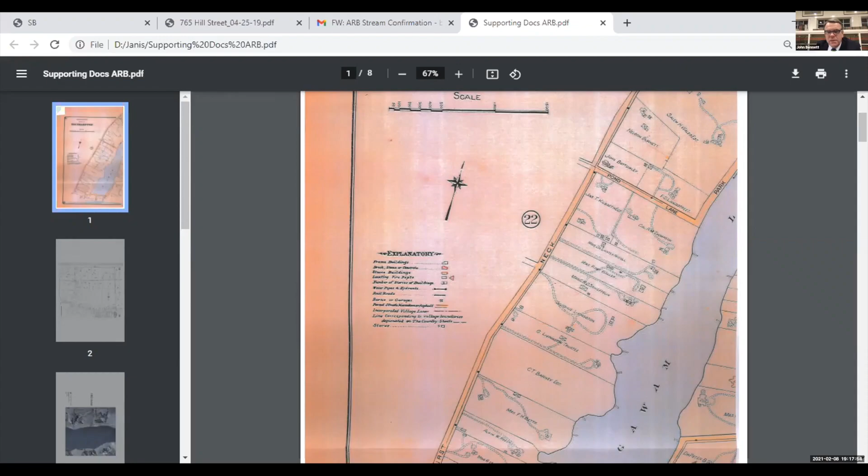Look at the west side of Agawam, look at how big those parcels were. But in any event, there's nothing where the Janis house is. And then we're going to take you to the 1926 Sanborn map, and you'll see that's about 10 years later, and you'll see nothing there also. We're lucky enough to have a copy of this in our office, just a black and white copy. So there you go, see it? Then Pond Lane - so nothing where the Janis house was. Right, then we'll take you to some aerials.

And these aerials, are these from Suffolk County or the town of Southampton? The town of Southampton aerial. You can see there's the parcel, its tax map number outlined in yellowish orange. And you'll recognize the house and even that little circular driveway. It's rather remarkable how accurate those Sanborn and Belcher Hyde things were.

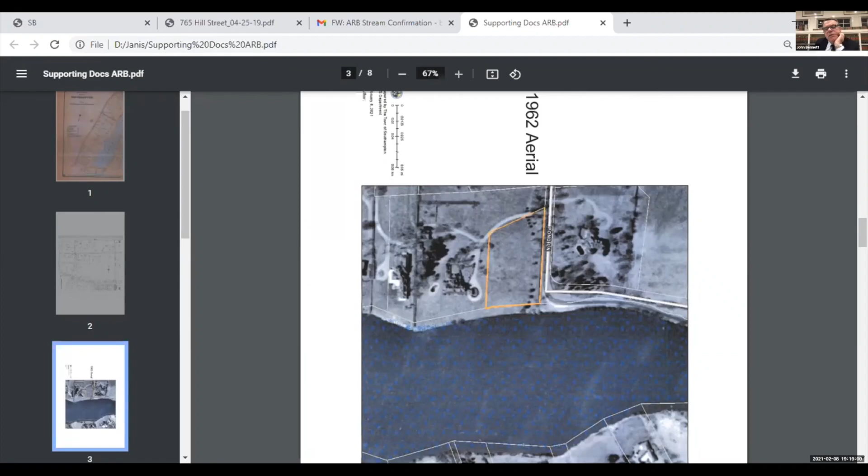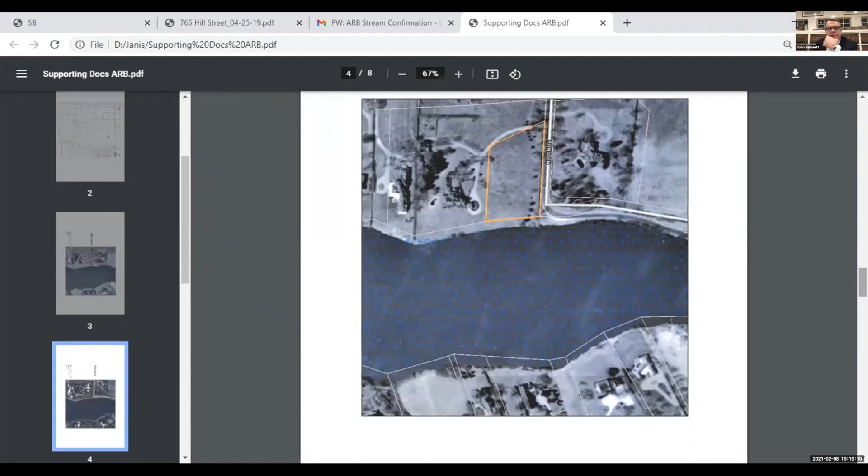There's the aerial there. You'll recognize the house that was to the south of the Janis property. So that's the 1962 aerial. And then in '76, you'll see the house appearing, but we know it was there before that. We'll show you the—

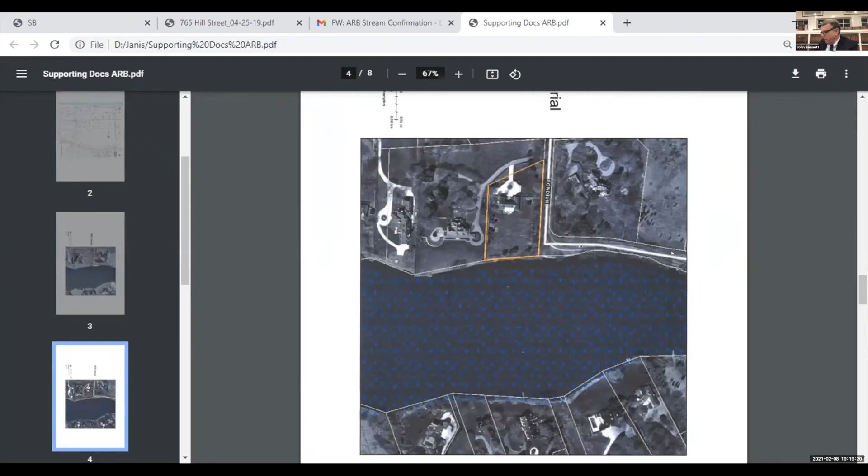Let's see, the town of Southampton has it built in 1970, but I think that's off by a couple of years, because the next thing you'll see is the village of Southampton. I don't know if you guys are familiar with these.

I guess you use them sometimes. You see them, these are the cards, we call them the cards. That's old school in the village still, the property has a card. And so 1967 is a building permit, and that's the house you see from the '76 aerial.

And if you look at the house, I always feel strange saying this because I'm sure Mrs. Janis had some wonderful times there, but it's a totally unremarkable house. It doesn't meet any criteria whatsoever. You don't know who the architect is, but he certainly wasn't having a very florid day, whoever it was. The most remarkable thing about it is the lovely spot and location. But I'm hoping you'll agree this is not really of any moment at all, and should just quickly be given a certificate of appropriateness.

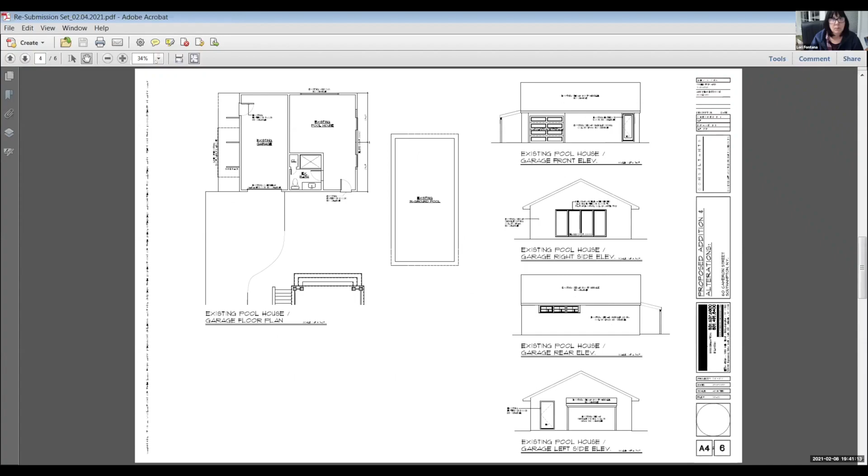I'll start, shall I? May I start, Jeff? I think we may have lost him, so go ahead, Sarah. He froze. Okay, he went on the table.

I maintain that this elevation interferes somewhat with the nice 4-square facade. I also think that, for want of a better expression, homogenizing all the window openings, you lose the idiosyncratic nature of an historic building. It becomes repetitive. And one of my biggest objections is that the proposed rear elevation is still, although better, still provides far too much light pollution in this densely packed area.

I walk down Walnut Street all the time, walking my dog, or up Pine, so I'm well aware of what a visual impact this will make. You can see the rear elevation of the Cameron Street house down behind 3 or 4 of the buildings on Walnut Street, and I think at night this will be particularly, literally, glaring for the people who live on Walnut Street. Because it is so densely packed there, it may provide the same qualities that provide light for your client's bedroom but will also shed light on the adjoining neighbors. And above all, the second story, it'll be pretty glaring. So that's all I have to say.

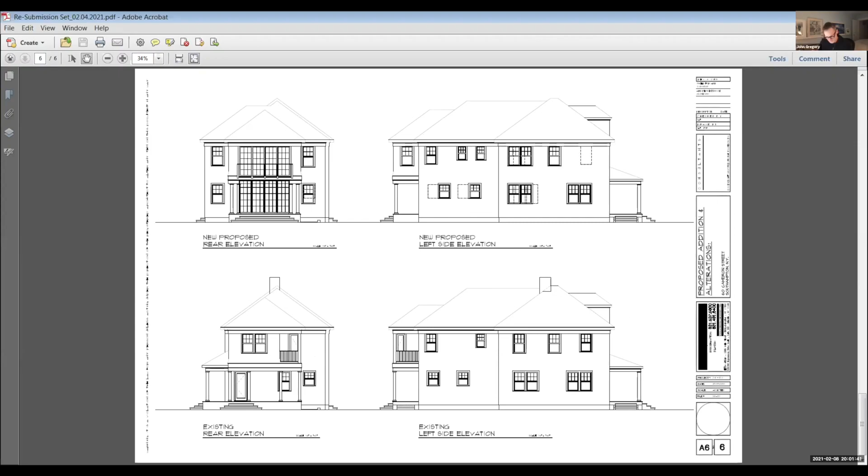I'm looking at the site plan for a second. So currently there's a patio that extends from the house almost all the way to the property line. Is that the case? It appears to be, on the west side. Would the architect like to talk about that? It's actually a stone on-grade patio, not above grade, but it's masonry coverage. It's existing.

It's always been there. And am I right in thinking that there's recently been basically a parking surface added to the front of the site? Yes, yes, we did ask permission.

Sorry if I interrupt, I will also explain about the tree. So the tree, I mean, it was actually really not something we wanted to do because we love the idea of the shade. But the tree had these branches that kept falling, and I had to call someone, and they explained to me that it's called a dirty tree, and it's a normal thing, and the branches kept falling, and twice my kids got hurt, and it became kind of my issue, the tree. And actually I asked the landscaper to plant something that will grow higher so that we also want privacy. It's not like it was an exciting choice for me. It was kind of something I couldn't avoid in this sense.

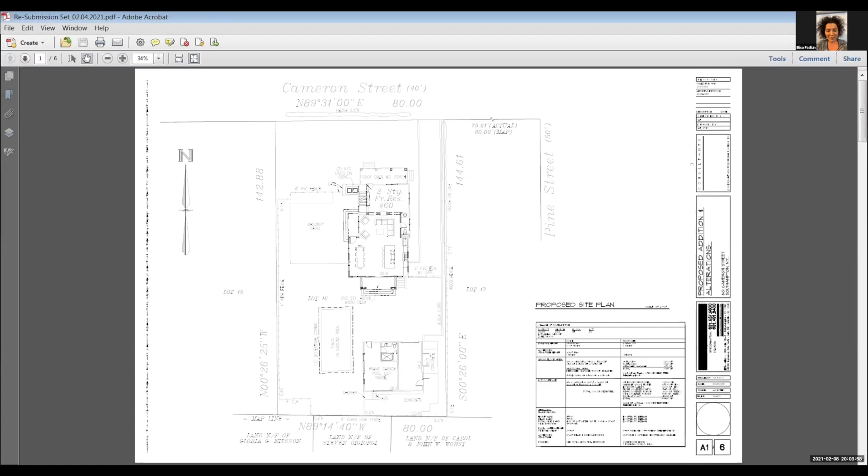And I also wanted to thank you for appreciating that we changed completely the original excessive renovation that I didn't know we couldn't do. Yeah, the front facade, that was. And the side facade, and the back, and the pool.

I'm just wondering if additional plantings could be made to help. It will absolutely be, I want more green. We really had an issue with the kids getting hurt from these branches. But yes, absolutely, those that we already planted are supposed to grow very tall. And that's what I asked the landscaper. I mean, I can plant, I'll be happy to, I'll make a jungle.

Okay, one other thing that I think will be an issue is the PVC fence. Can it be wood, painted wood? I'm sorry, which one? Oh, the fence, it's on the site plan. It says it's a 6-foot PVC fence. It exists currently, Peter. Oh, it does? Yes. Okay.

I think at this point you've heard our comments. Yeah, I have nothing more to say. Thanks, and thanks for listening.

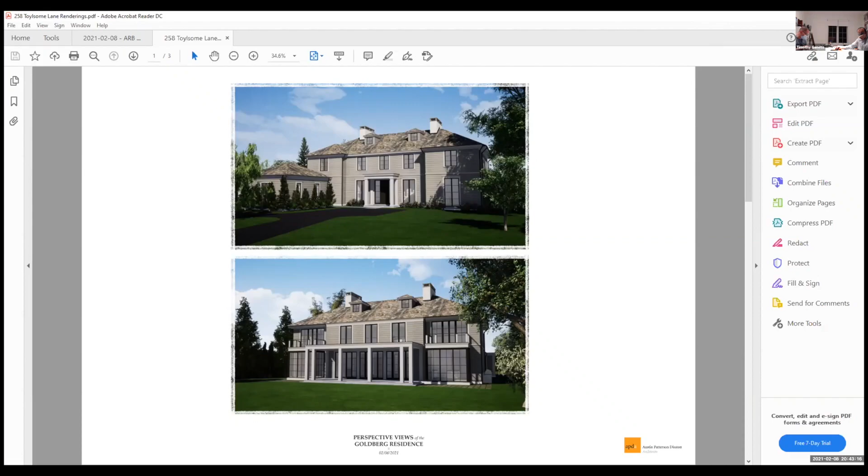We're going to switch to a legend that shows the surrounding properties and the streetscape, and Tim's going to walk you through that for a second.

In an effort for us to take the renderings and drawings and put them in context with the surrounding properties, it's important to think about Toilsome Lane, but also the entire context of the neighborhood and the adjacent streets.

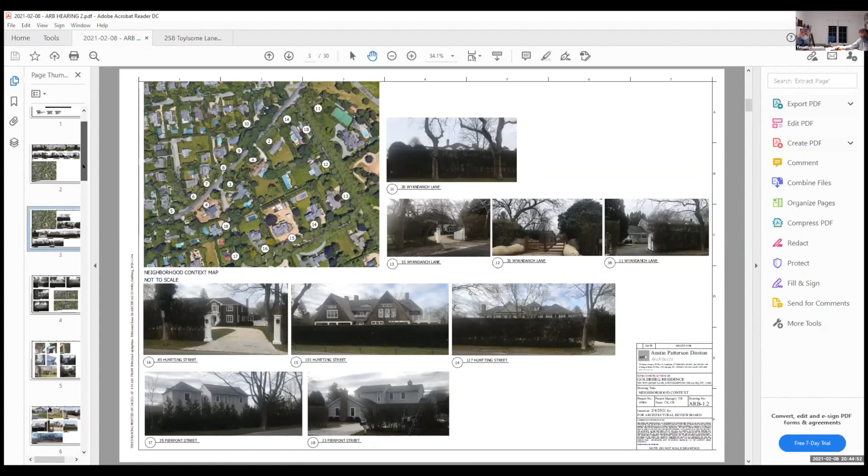That being said, I'm going to go back now to some of the other refinements to the overall presentation of the architecture. So we're going to switch now to perhaps ARB-5, which everybody has in their documents, but we'll put it on screen.

This is part and parcel to the removal of the large public deck above the center axis of the building. As you've probably realized by now, as suggested by the board, we have eliminated the large gathering deck entirely. It is completely out of our scope. There will not be any ability to use that space.

We still have our smaller decks that complement the master suite and the guest suite on the southeast and southwest side, but we wanted to come back to you with some lines of sight and site studies of how the views would essentially be taken in by any of the easterly, westerly, or southerly views and neighbors, because there should be a consideration in the way of planting and also the sight lines.

I like this particular one - we have a couple of different media that we're going to show you today in terms of how this has been accomplished.

This one is one of my favorites because it actually shows relevant architectural data - datums, elevations, the first floor, second floor, roof height alike. These can be a little bit more powerful than just an image because you're looking at actual axes, sight lines, and cones of vision. This particular diagram at the top - Tim, I'll let you take it through it - shows the existing conditions that we've measured from existing evergreen and deciduous trees and hedge, all field verified by Austin Patterson Disston architects on site relative to the surveys.

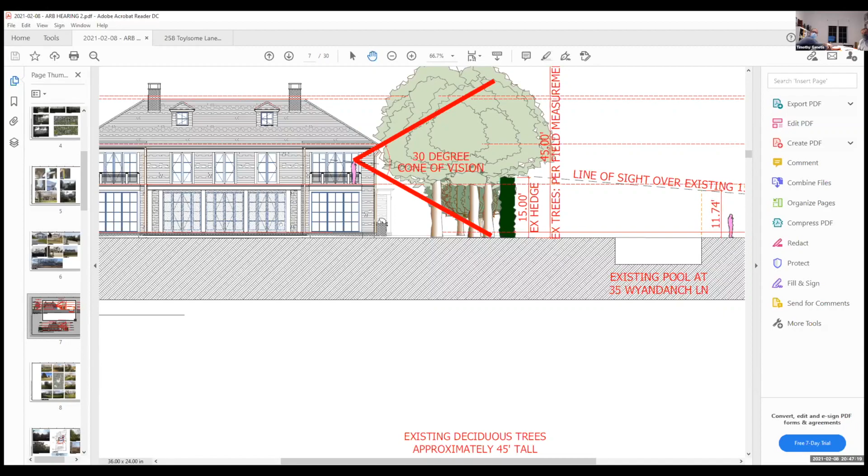Of course, we'll talk about the westerly side as well, to a point where looking through the hedge and over the trees doesn't allow the cone of vision to make landfall for about 184 feet to the east of the property line on the hedge.

So while we always look to create privacy for ourselves and our neighbors, I think this is a powerful image in terms of looking at the fact that just alone the existing evergreens and deciduous tree lines create very much a buffer and good privacy.

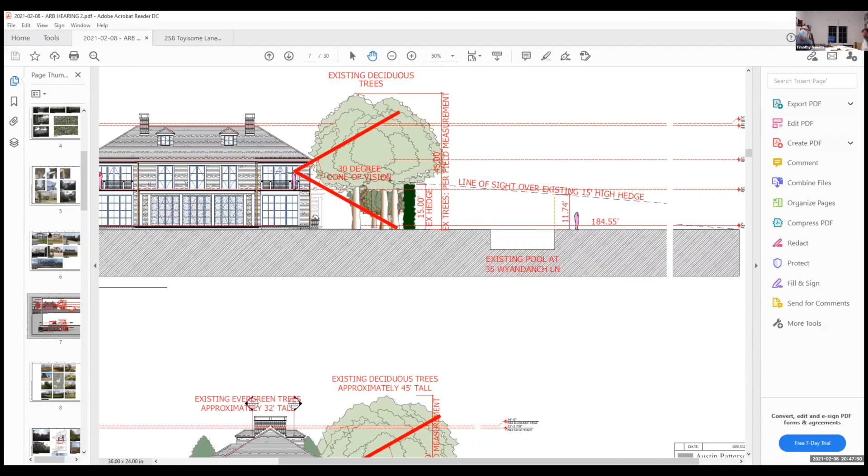Also, if I back up here, you can see a similar study done to the westerly side. And on our site plan, we are showing some additional plantings wherever we have gaps in the existing foliage.

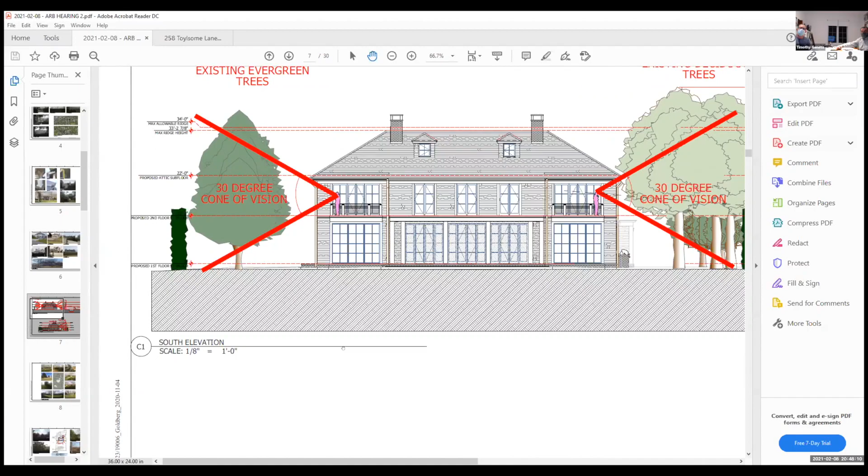Now, I do like this diagram, but I want to take you also to some drone visuals that we did based on coordination from a drone operator who I believe also had written a statement about his process and science relative to this diagram that you're going to see on screen. Yeah, go ahead.

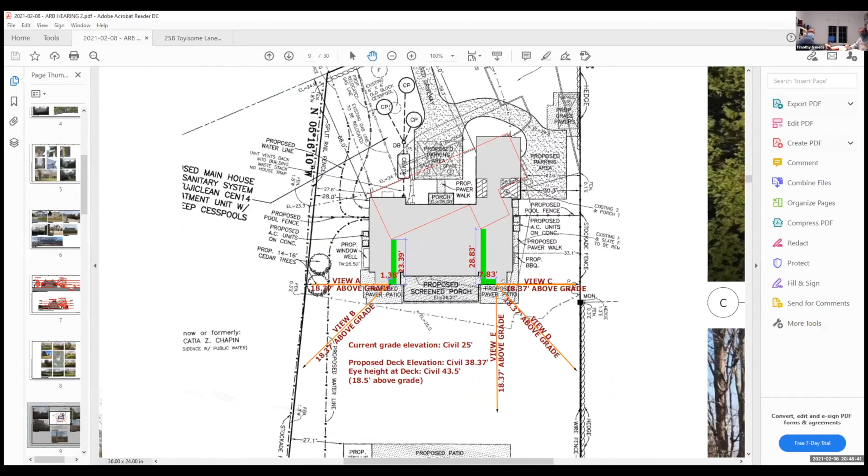Our client, Craig Goldberg, had hired a consultant to provide drone views at the approximate eye height of an individual standing on the proposed balconies. In the diagram, a thin red line overlaid over the proposed demonstrates the line of the existing house. The thick green lines and associated dimensions were instructions for the drone operator to triangulate where to fly the drone to get the accurate view of the center line of the proposed second floor balconies, and the directions from which to take the views.

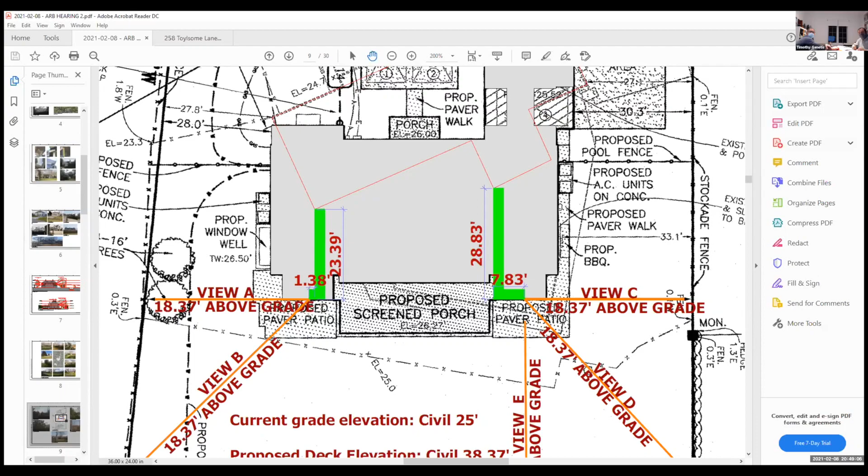We'll start with the east property line, View C.

You can see the existing evergreen and deciduous... I'm sorry, one second please, we're having some technical difficulties.

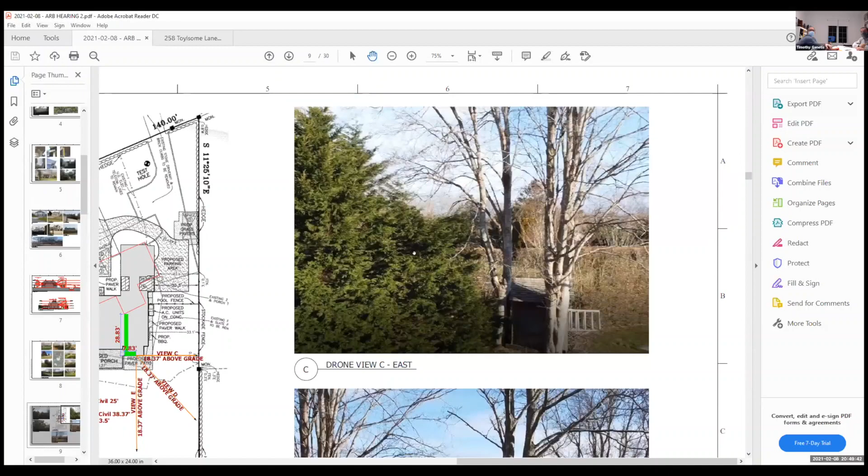There we go. You can see the existing evergreen and deciduous screening as well as the 15-foot privet hedge. That is the view into the adjacent neighbor's property. This drone view D is an angled view showing the same. And then view E is through the backyard.

I'll show the other side, west. On the west side, similar triangulation. There is a bit of a gap here as it's the northwest side of the property, and the existing evergreens were not nearly as tall, and they were shading the privet hedge.

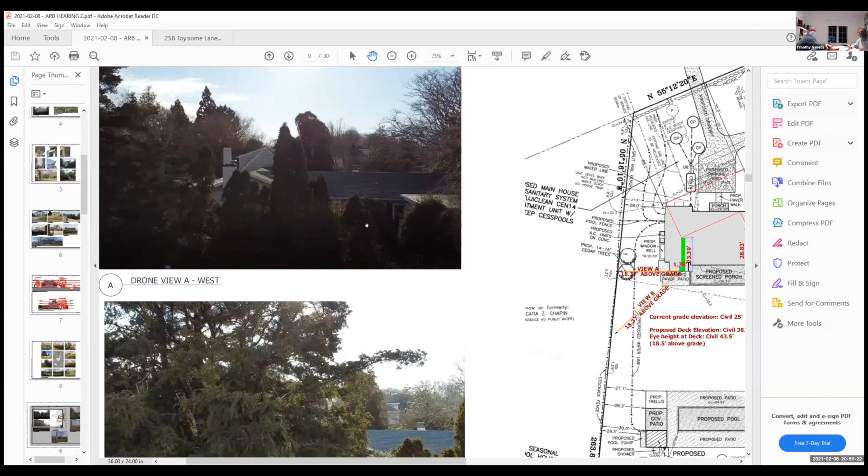So in any areas where privacy is needed, we propose to plant cedar trees. They were noted on the site plan. I believe there were 2 proposed in the site plan, but we could always look and see if there is need for one more, if any gaps have appeared.

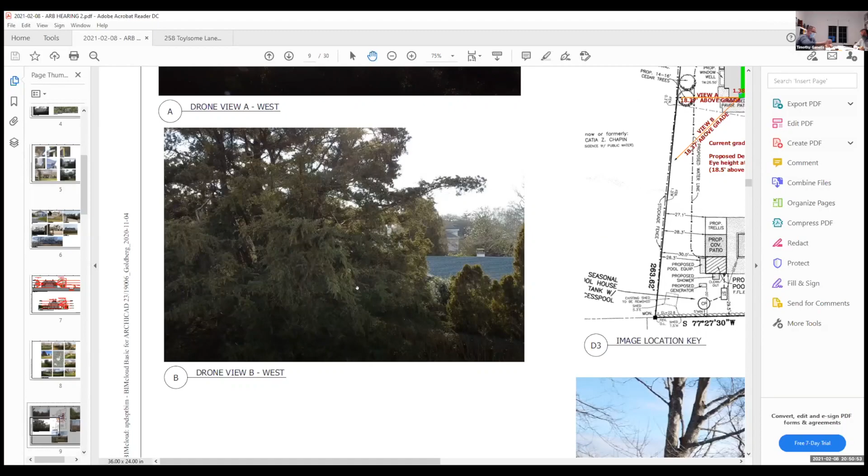Yes, over the winter. So where there's not enough buffer, or we think the privacy hasn't been accomplished, we are preventing any gaps in vision to promote our cedar trees and any other trees that may be necessary. Let me just continue that - site plan drawing, we'll skip to that.

Also part of the presentation we wanted to address was a few comments from the board about the materiality and the renderings. We all know that architectural renderings sometimes just don't do justice to the overall feel and softness of the materials. So we dropped off some samples to the building department for everybody on the call today, so you can take a look at it. I do believe that they're a little bit softer than some of the presentations.

If you can all see what I'm holding up right now, it is a representation of the exterior walls in white cedar with an Enviro bleach stain, which I believe you also have your own copies of that we had dropped off. We also have a small sample of the color white dove for all the exterior trim. Of course, no PVCs or plastics - this would be mahogany and cedar. And that is the color of that.

And also we have substituted our black trim for a bit of a softer midnight bronze. And seeing the materials together, I think it gives a little bit of insight as to the softness, because in some cases it's not just the actual specific material, but the collaboration of materials that creates the final presentation. I just thought that was noteworthy. That was the end of our presentation.

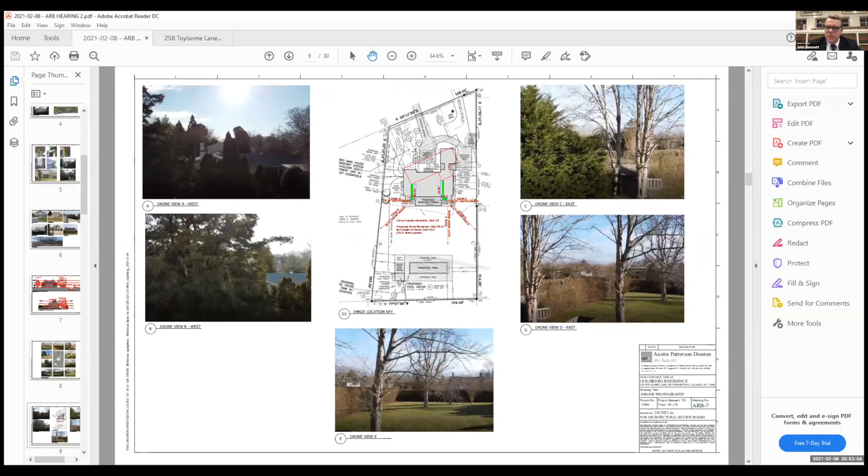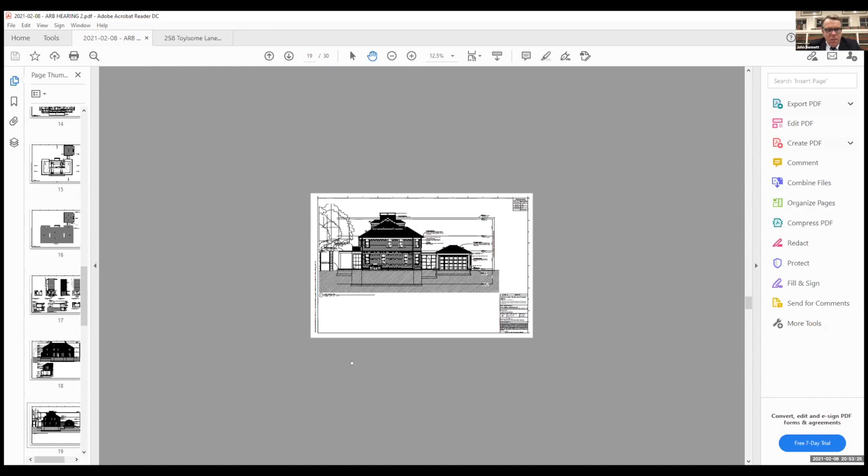I understand the concern about that modern farmhouse look, which sometimes you look at some sort of style developing and realize it's just going to be a signature for a certain 5 or 6 year period. And I agree, it sort of became overly common. And the way I saw it, and to be honest what became sort of an offense to the eye to me, was an extremely white, almost white gloss exterior with black trim. So we spent a long time going through different iterations to try to get away from that, and hopefully you'll think we're really successful.

We sure tried, because I understand, and it's not my job - my feeling or thoughts don't really count, but I understand where some of the board members were coming from with what had become boringly common. The first time you saw it 10 years ago, that's pretty cool, but I understand it had become really mundane and sort of unpleasant. So we really tried really, really hard to get away from that, and I'm just hoping that you'll agree.

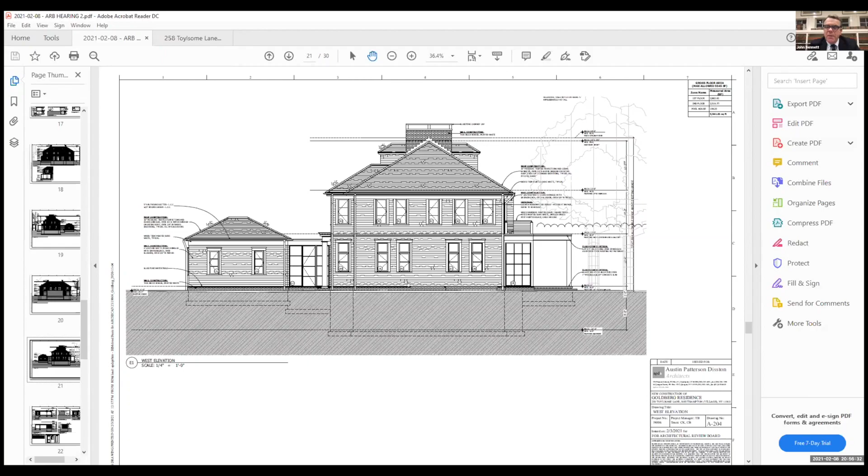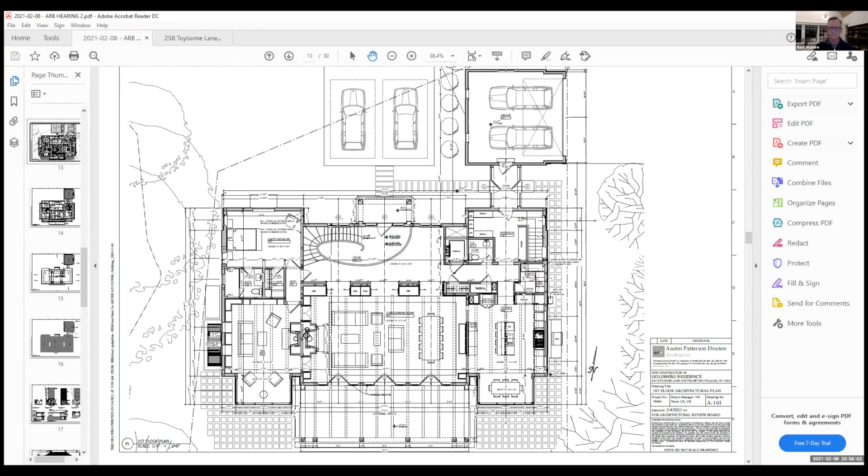No, I can respond to that. It absolutely does not - it is joined by habitable space. The only limitation in the village code expressly allows that. The only limitation is that it can only be twice as long as it is wide. But in the spirit of the village on this street, I still think that in the spirit of not wanting accessory garage buildings in the front yard, this still qualifies as an accessory building in the front yard. But it doesn't - you can ask your counsel. I'm confident that she'll agree with me. It's not. I agree with John.

So the question from our standpoint is the scaling of it, which is within our purview. To that extent, if that impacts on it, that's well within our ability to comment. Well, that's a different question. I understand, that's why I'm making the point.

Mark, other comments about the design or look? The house itself is beautiful, I think you've done a good job addressing the side issues in the back. My only issue is I think having the garage in the front yard, that another board also did not feel appropriate, also makes me feel like it violates the spirit of what the village wants. Yeah, garages in front yards. Yeah, I understand what you're saying.

Yes, Sarah. I think that the client and the architects have listened, even though basically most of it had already been approved, and I'm grateful for their being so politic about accepting the criticism. I think that the garage is vastly improved, and the transparent link has finessed it beautifully, and the discrete building is better for it. I also believe that the two side balconies, rather than the big one, should address privacy concerns, and the bronze rather than the black has created a better overall design, and what was going to become passé quickly is no longer that. I might add that we have two applications that have black windows, so it's really become rather a tic rather than something that is desirable. So I say thank you.

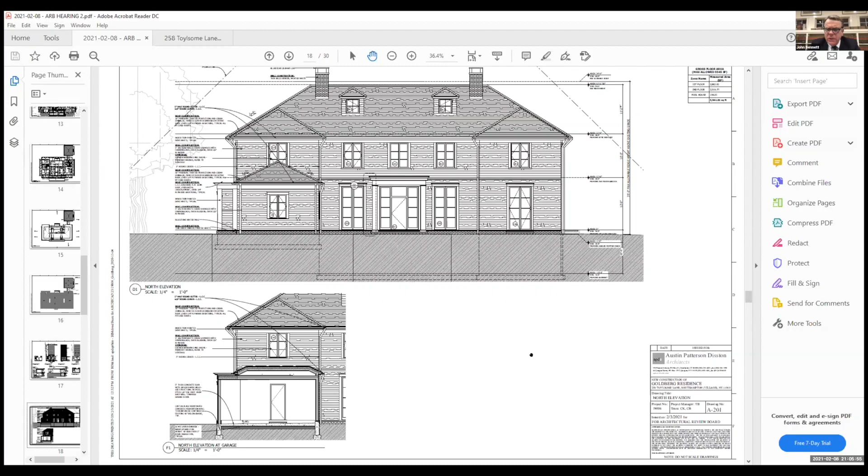I apologize, I'm looking for the site plan. Is it in a conforming location, guys? Yes, it is, I'm going to pull it up on screen, John. It's in a conforming location, and our clients are more than willing to be very neighborly, and I'm sure will make every effort to visually screen that with evergreens to the point where it's not any type of obstruction. What are they, on for like 10 minutes once a week? Do you have any idea what the schedule is? They're typically 5 minutes once a week and cycle through, but it's otherwise very typical. And it's in a conforming location, John.

Okay, I will tell you, for whatever it's worth, it's nice to see it in a conforming location. The building department for many years, 30 years, took the position and still does in many cases that a generator doesn't have to conform to those requirements, so I'm glad to see that it is. But I do want to say I think 5 to 10 minutes a week - thank goodness they get quieter and quieter all the time. In the old days they were just a big, fat, loud diesel engine. But in any event, we'll talk to see if there's any attenuation that we can do, right, team?

Yes, sir, absolutely. Ms. Kolokundis and Mr. Goldberg are trying to be good neighbors. We would greatly appreciate that.

One of the concerns is that, based on where it's placed, it's not just that it's at the farthest point away from their house and closest it can get to three other neighbors - it's that it's on the south side of the pool house, so whatever noise is created will reflect off. And the point of having a generator is for when the power actually goes out, and it could be, as we all know from Sandy and Irene and a bunch of other storms, it could be weeks at a time.

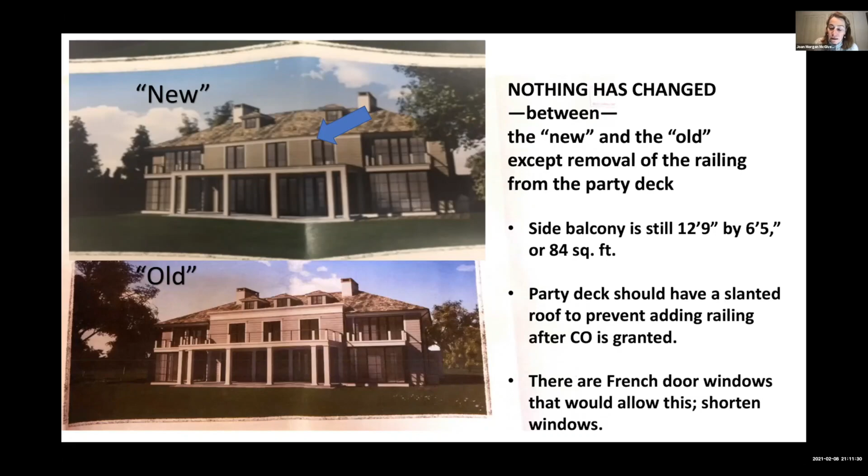Okay, thank you for your indulgence. So we've already pointed out that they removed the railing, but they still have the side balconies that are 84 square feet - they haven't reduced the balconies. They're hardly Juliet balconies, which is what my client is concerned about. And the French door windows - although John is right, you don't want to presume that your client's going to break the law, they could also sell the house and a subsequent occupant may break the law and put up a deck rail. So one of the board members had suggested maybe having slightly shorter windows, so there'd be less temptation to open the French doors and walk out onto the party deck. If you'd consider that, that would be appreciated. With respect to the drone study, I read the letter of Christopher Brosch, I think his name is, and there were two issues with it.

One issue is that he calibrated it from the existing structure's elevation, which is not where the proposed house is going. And second, he said there was a limited line of sight to the roof of the adjacent property, which is not the concern. The concern is to my client's backyard. Her roof line is not relevant. Also the existing house is lower, and the new structure's second floor balcony appears higher, although we couldn't tell from the drawings how much higher.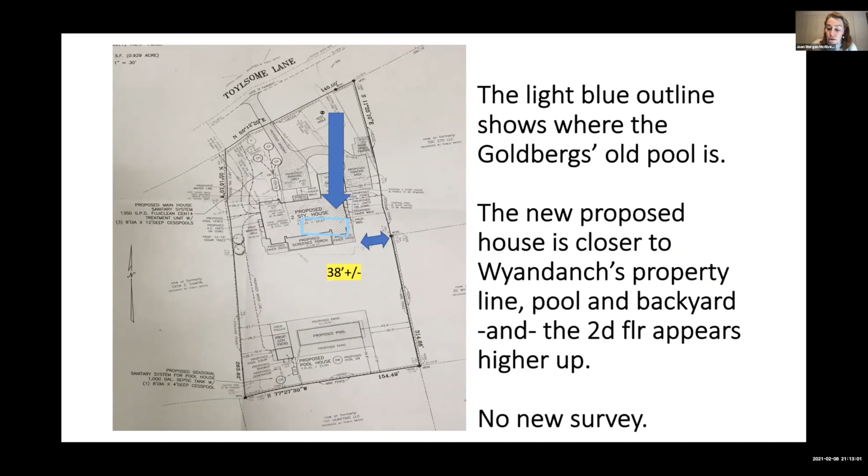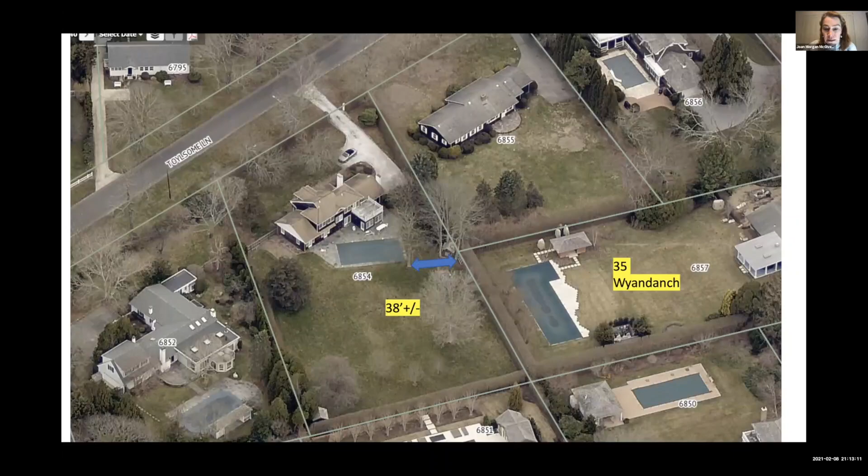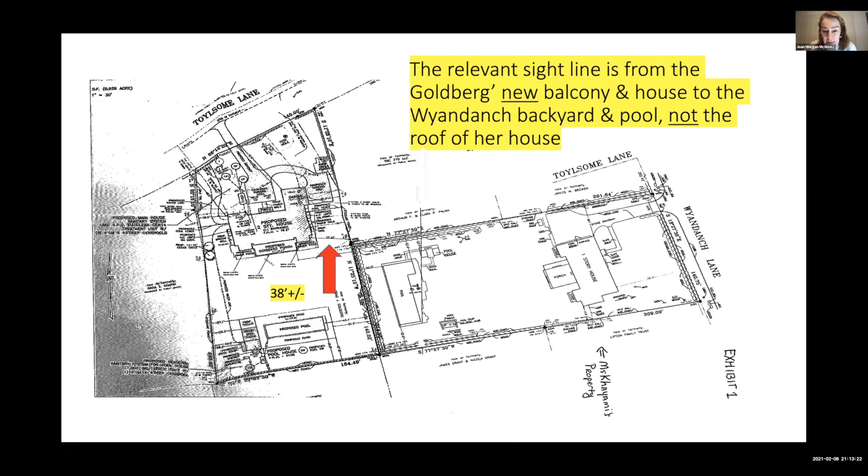This is another aerial view of the same thing, from the old pool to my client's pool. This is another angle showing where the red arrow is, the proposed new balcony into her backyard. You could probably visualize it best by the drone picture we took, approximately at 10 feet. The red arrow is about where we believe the balcony would be, obviously on the other side of the tree. So it's much closer to her property than the line of sight vision that was provided. This is another angle.

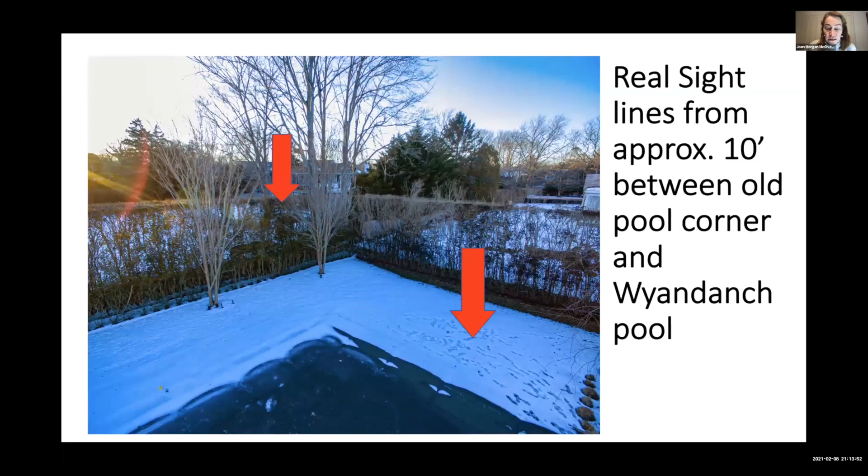We also had an issue with the Goldberg's plans because there were mature trees and hedges shown. Even in the summer, they don't provide the bulk or density that the screening suggested by the Goldberg's sightline study showed. And there aren't any guarantees that the mature trees won't be damaged during construction. Shahrazad Khayami had construction on the other side of her where they damaged her hedges, so she's quite sensitive to this issue.

So in sum, she'd like to see the balcony closest to Wyandanch removed. Certainly it's not a Juliet balcony. The suggestion of a hipped roof, or possibly having the windows shorter than French doors, would be helpful. The Goldbergs have not reached out to her to discuss a landscape plan that would ensure her privacy and not completely shade her pool. In anticipation of mature trees being damaged, we'd like to see something in a landscaping plan that would anticipate that. Although this is not your bailiwick, a silt net should be provided to protect her existing hedges.

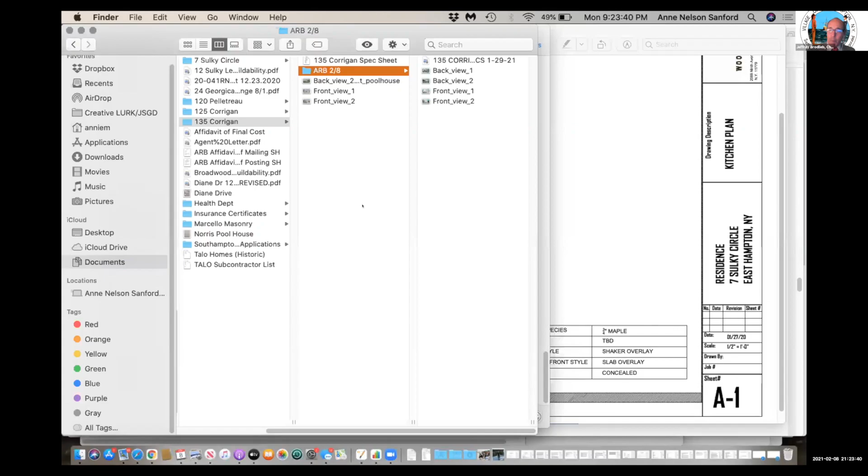Great, and for the benefit of those listening and the board, there was an issue about the tower element in the front, as opposed to the gable looking just lovely, and then there was an issue about chimney pots to match the drawings. Board members, if I left anything out, let me know. But Ralph, I'll turn it back to you - did you already identify yourself?

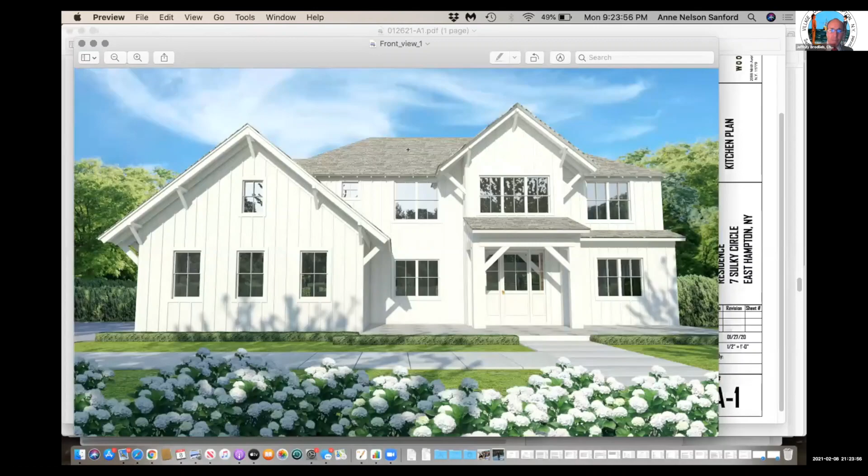I don't think I did. It's Ralph Rastu, Talo Building Corp, 58 Court Drive, Huntington Station, 11746. Okay, you guys can see my screen?

Yep, all right, so here we pushed back this whole front tower as requested by the board at the last meeting. We added the shed roof across the front here instead of the 2-story tower. This is actually the window that's interior now, so there's no double window and there's no 2-story space on the inside here. And then I will go to the rear elevation.

Okay, and here's the rear elevation where it's Lorraine, that shows the field stone. It's supposed to be Lorraine White. So this was changed to Lorraine White, and the pots were changed to a natural color. The brick.

The renderer made a mistake, but it's on the plans. It's notated on the plans that it's Lorraine White. I actually thought in the last rendering it was white, wasn't it? I don't think so, but we did notate the plans that it is Lorraine White. So I guess the renderer did not change this.

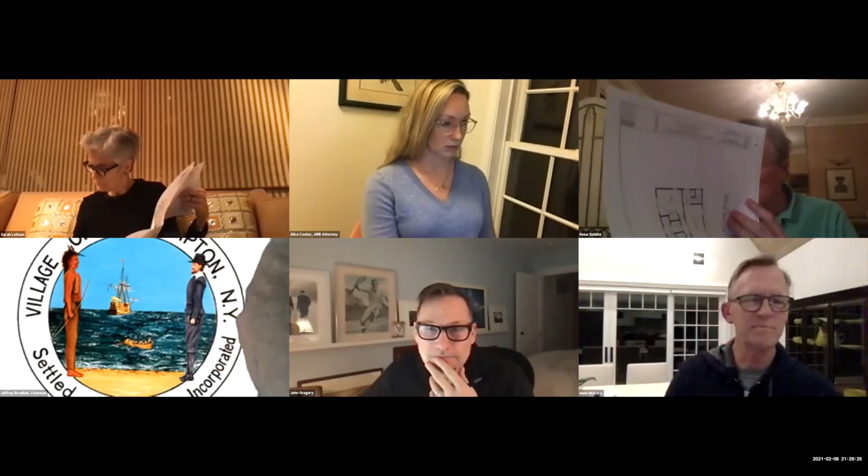I'm just going to get a glass of water. Hold on. And here comes Lisa Zaloga. There she is. Hello, Lisa. She's almost all the way in. There you are. Hi, Lisa. Hi, Ariel. How come you can't see me? Here, let me ask you to start your camera. Oh, we see you. There you are. I am, how are you?

Hi, everybody. All right, so whoever is representing the applicant, and I assume it's you, Lisa, please identify yourself. Lisa Zaloga, 1375 North Sea Road, Southampton. I am the architect for Alex Wolf at 35 Cooper Street. And I would like to share my screen with you guys.

Okay, and this is a new application, correct? And I submitted my affidavits of posting and mailing. Yes, correct, thank you. Okay, so you can see— Stealing my thunder. Sorry.

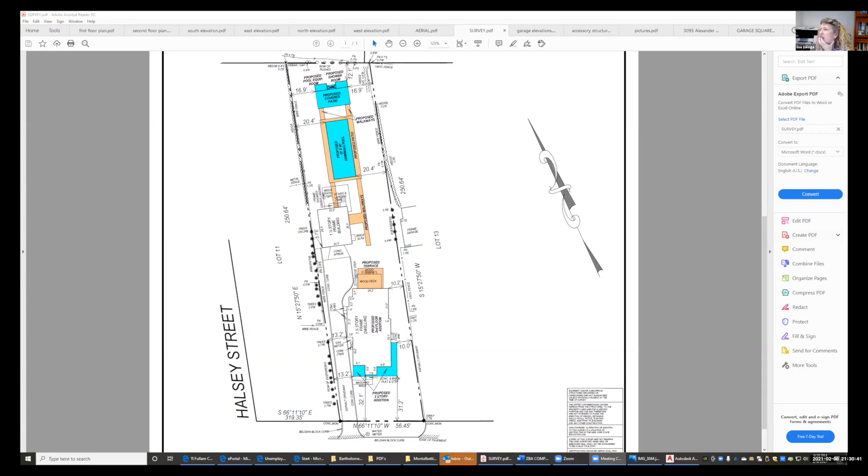Okay, so you guys can see my screen, I hope. Yes, we can. So this is a piece of property on Cooper Street.

It currently has a 1.5-story house and a 1.5-story frame building that is a garage on the first floor, with just an open space on the second floor with a stair, an exterior stair that travels up to it.

We went to the Zoning Board of Appeals, and I have my decision that we got last month to have a few breaks in the pyramid law.

But as you can see, we're not really becoming a full 2-story house. We're a 1.5-story house, and we're only about 23 feet tall.

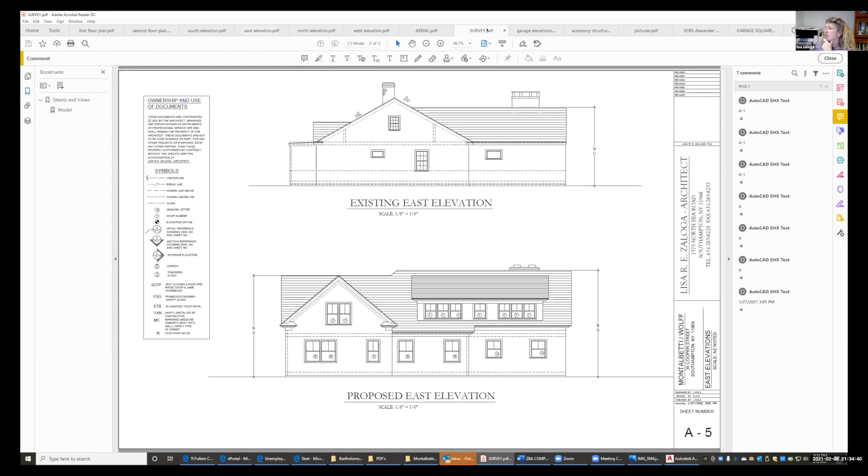We have created a little bit of a steeper gable and our shed dormers. Then we're going to remove this wood deck in the back, and we're going to put a terrace off the back there.

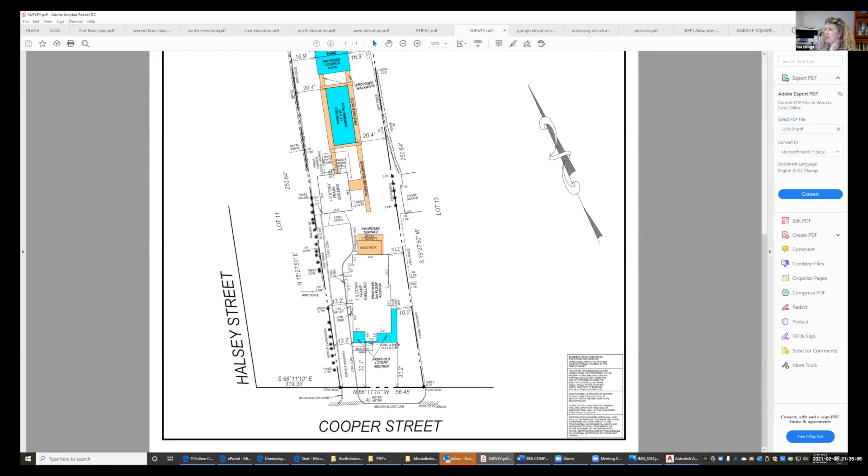The purpose of this frame building - we are going to use it as more of an accessory building than a garage. We're going to remove the second floor out of it and just have it as a cathedral space. The stair going up to the back will also be removed.

So currently it's a garage with a large garage door here. We're going to have storage on one side, and we're going to mimic the doors on the other side, but they will be false. And then we will just be opening it up with a pair of doors.

And we are removing - there currently is a window on the west elevation that looks into the hedge in the neighbor's property, and we're removing that.

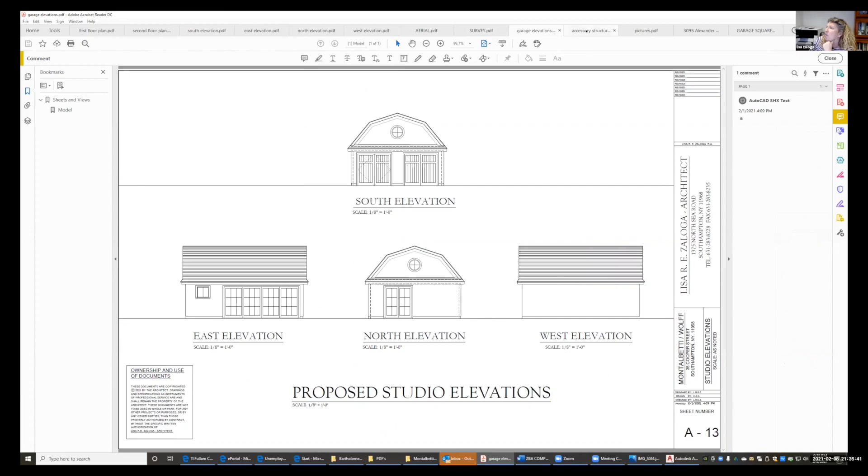We also, behind that building, are planning on putting in a swimming pool and just a covered terrace area, no windows, no doors, just the fireplace with an outdoor shower and the pool equipment shed behind it.

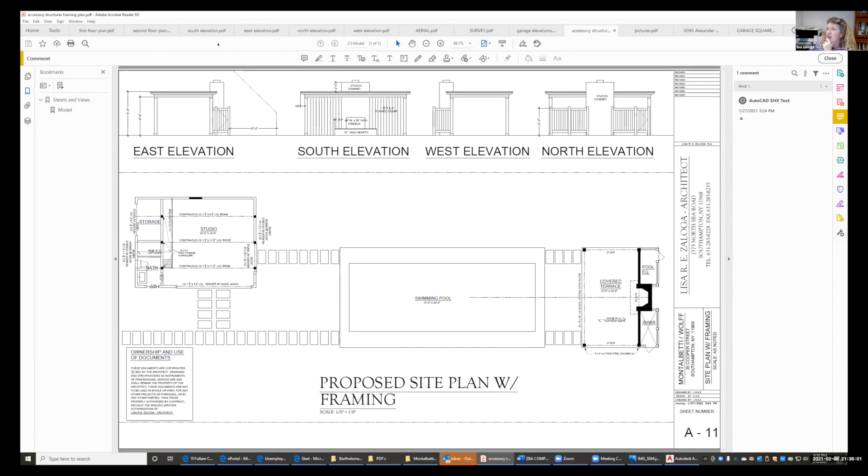So our materials are white cedar shingles, a cedar roof, Glengarry brick is pretty much what's there. If we have to extend it, we will match what's there. And the trim will be painted Azek, Andersen windows.

Any questions? Board members? That sounds to me like no objections.

I just need to make my normal pointing out that there's a lot of Azek, which is basically a PVC product. All of the application of Azek and PVC is going to long outlive us both in the built environment and in the ground.

And I wish that we could move toward timber products instead. I know that when painted, everyone says you can't tell the difference, but eventually it'll break down. And I wish we could figure out other materials. End of sermon.

Duly noted, and I've shared with Sarah that I have her same concerns. The village is concerned about Lake Agawam, and I know it's a different type of pollution, but anything we can do to improve the world in which we live would be great. We seem to have managed to stop the sale of plastic bags, but we perpetuate it in our built environment, and I find it amazingly ironic.

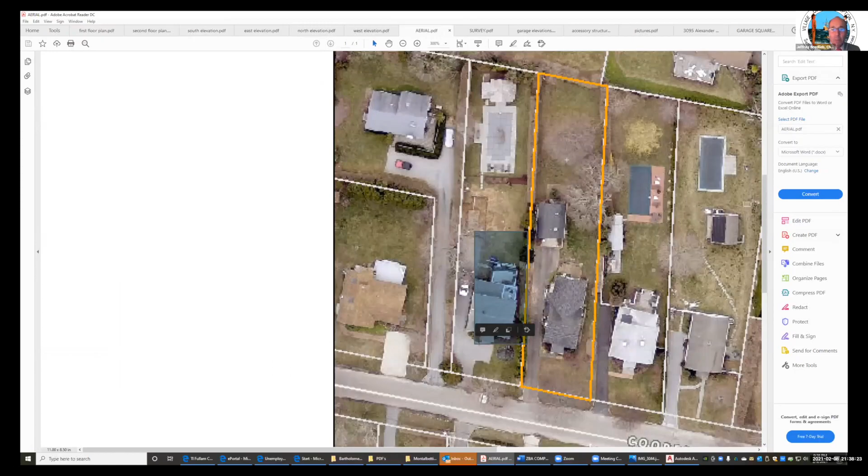My concern is one of privacy, but I think in this case, we'll deal with that with the neighbors, because I know they have the same concerns. So if there are no objections to the architectural nature of the proposal, and if there's no public comment, then because I'm a neighbor, I'd like somebody else to make a motion to approve the application for 35 Cooper Street. Is there a second on that?

Second. All in favor? Aye. Any objections? I'm sorry, did I see one or two hands? One hand. Lisa, you know the procedure. The ayes have it, and so I'll be signing the files on Wednesday. Thank you very much, have a good night, guys.

I think at the end of this, my voice goes into a higher register than it already is, simply because my throat gets dry.

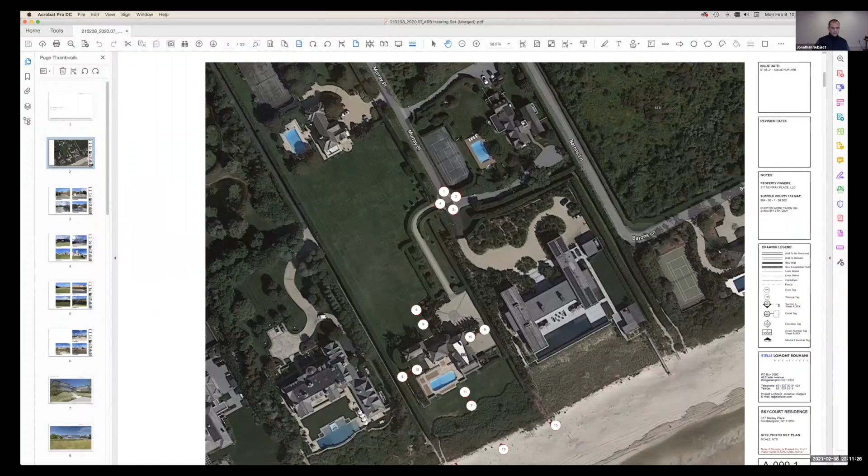So we'll start with the main aerial view that shows the access coming up Murray Place. Then I'll walk you through the photos showing the existing entrance, around the existing facade, and then we'll go into the renderings. So here we are looking at the various views. The view down on the bottom, number 4, is the actual entrance and the gate that's there now with the existing hedgerow.

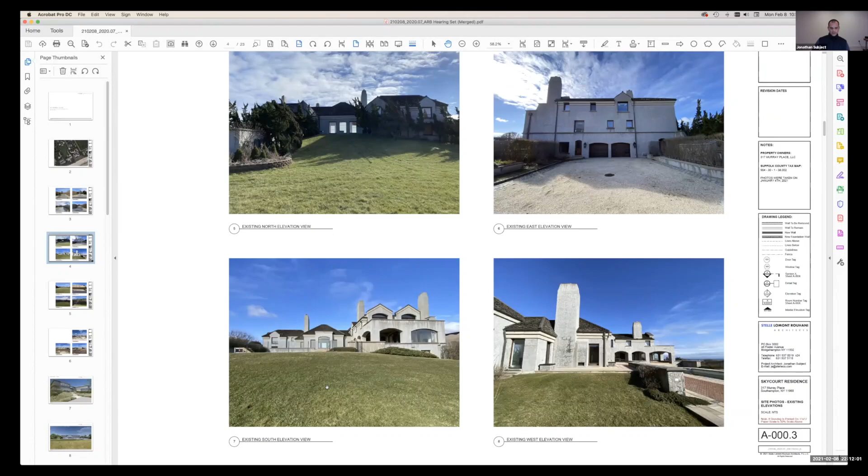And moving to the south elevation. So same thing, there's an existing lawn there, a view facing out to the ocean, and then the existing west. Moving to the next slide.

So now these would be views looking from the house back out. So the view looking north to the neighbor's property. The view looking east, number 10. You see a hedgerow there, and then the covered hedgerow, which is very tall, blocking out most of the neighbor's view.

Looking south, so you have the lawn, and then overlooking the existing dune. And then the view looking to the west.

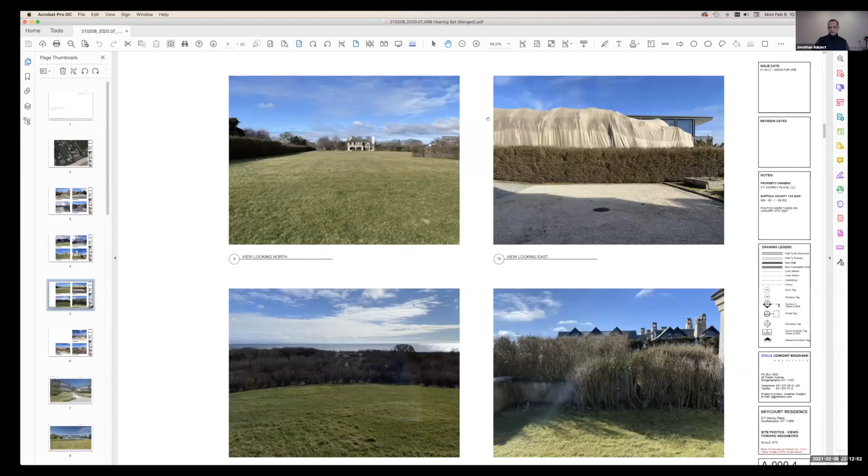Jonathan, just for the boards, if you can go one back, that large burlap covered buffer is on the neighbor's property. That's existing buffer on the neighbor's property, correct? Yes, the small hedgerow is on our property, and then the larger covered burlap is on the neighbor's property.

Okay, and then going out to the beach, top right, that's our view looking from the beach over the dune back towards the existing house. Bottom left would be view looking northeast, so our house, that same hedgerow, and then the existing house there. And then the view looking west, northwest.

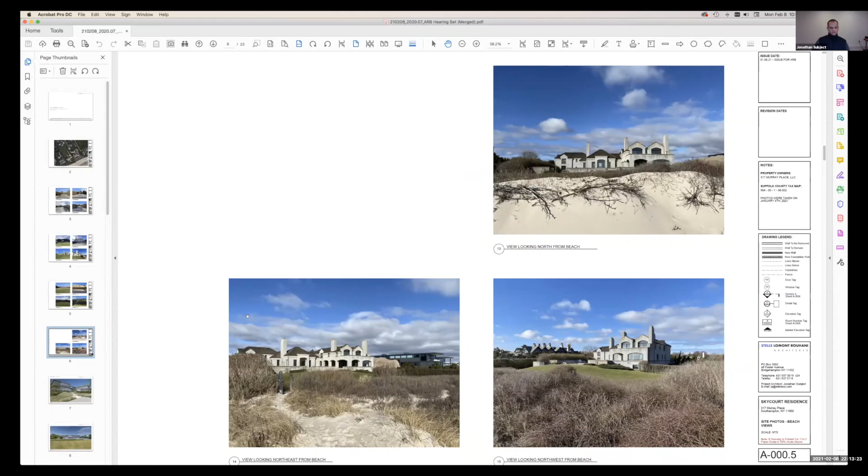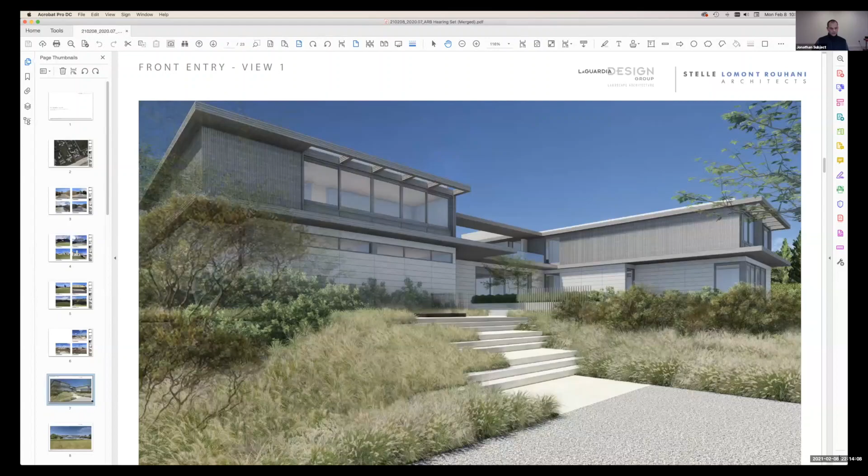Overhangs on the lower level, upper level. So for those samples, this would be the same limestone carrying through. The upper level would be that weathered teak. I should mention the doors and windows are all going to be a similar weathered teak. We would leave them to weather naturally.

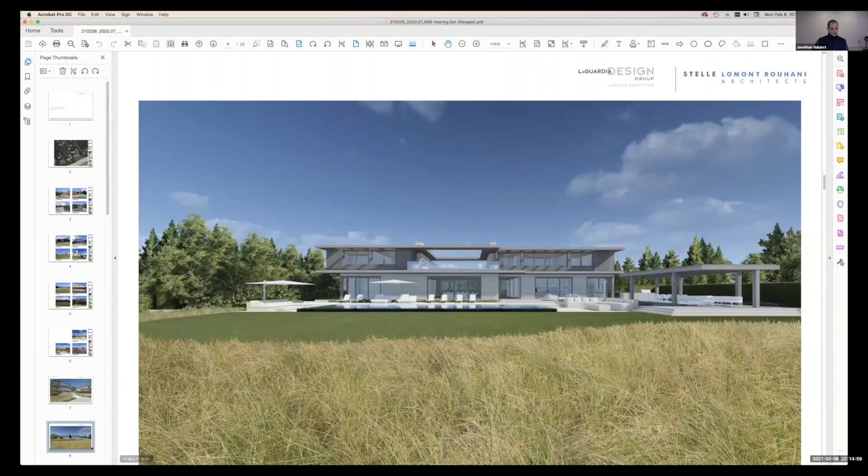Going to the next view. That's detached, oh yeah, never mind, yes, this pavilion here is detached. So this would be looking, the rendering has these trees back here where that existing hedgerow is on the neighbor's. Same thing.

Upper level, there is what we're calling the sky court. So none of these rooms on the second floor have access to a balcony. We have a 20-inch sill with glass above, and then everybody would have access to this center sky court, which would have a glass railing, and then it opens up and allows for the view.

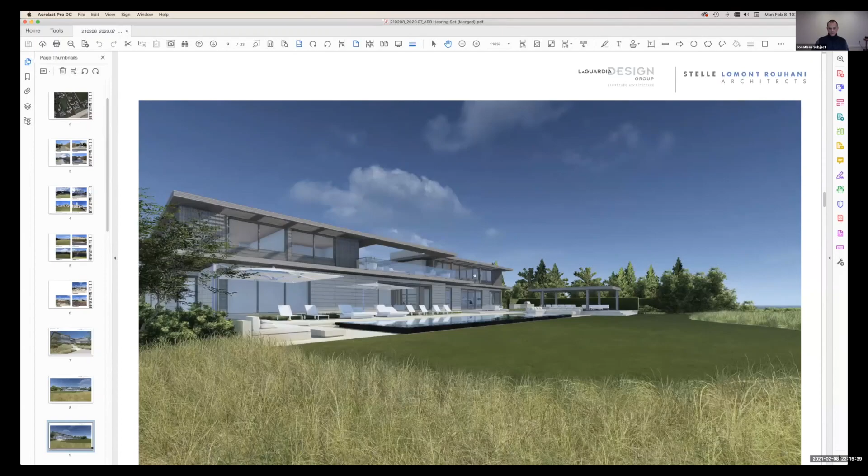Next view. So this would be your view looking from the screen porch back towards the negative edge pool. Proposing to have a little fire pit. On the right there, that would be the kitchen, main entry. Living room is in the middle.

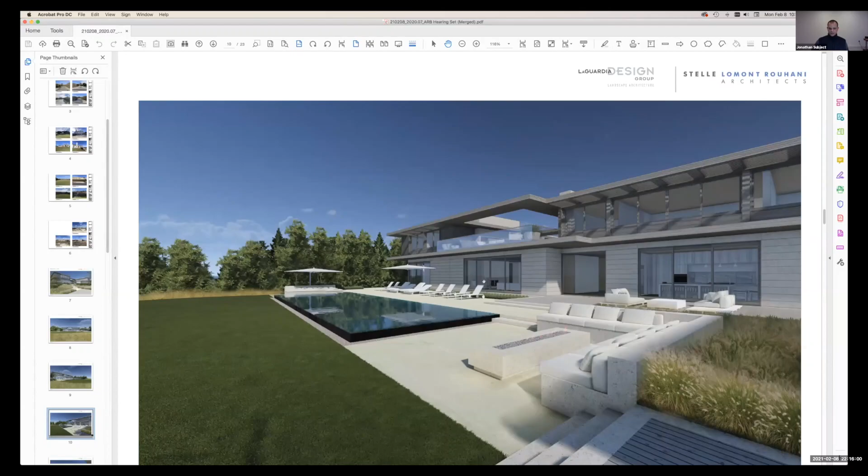Let's see the next view, and then of course looking out. So this would be coming through that main entry space. Upper level is the deck, and then you go down a few risers, and this is the same stone that would be on the house, with the negative edge pool, and then that view out looking towards the ocean. And then this would be that southwest corner looking back over the pool towards the screen porch pavilion.

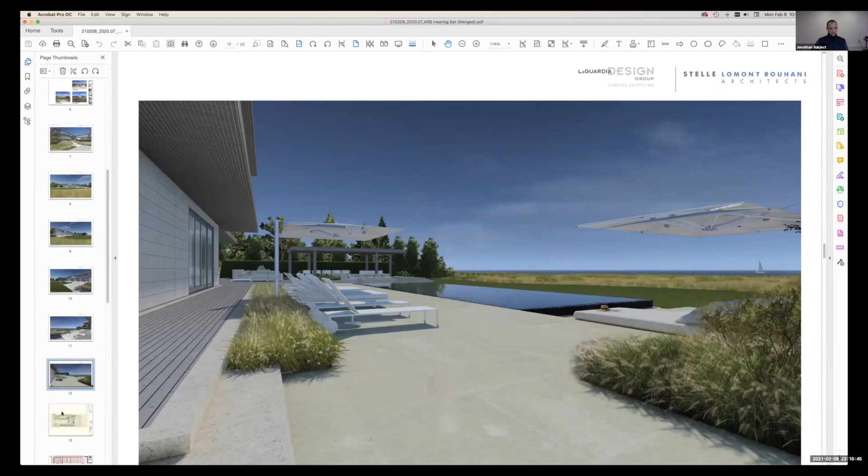So that's generally the architecture. Do we want to? Is Ian on? I am, John. So you want to take over and talk about the landscape a little bit?

Sure. Yeah, I think as John Bennett had alluded to earlier, and I guess for the record, Ian Hambach with LaGuardia Design. As John Bennett had alluded to earlier, we're working with a neighbor to the east to provide a suitable screen between the two properties. John had on that sheet A0004, image number 10, you could really see the screen that was already there.

We're not going to get too cute with it and try to reinvent the wheel. There's certain species that are going to live down there. There's a facade of that house, a facade of our house. We're trying to create a joint screening effort there, so we're going to work with their design team to make sure that's as tall and robust as the ocean's going to allow it to be. As John Bennett noted, we're going to work over the next few days to develop that plan.

With respect to the entry on Murray Place, there's an existing 8-foot privet hedge there. We're not altering that in any way, so we're going to maintain that character. I think the public perception from Murray is going to be the same. John did a really nice job showing the view from the water looking back to the house. It's a low profile, really sleek design, and I think it's going to complement the horizontal nature of that dunescape.

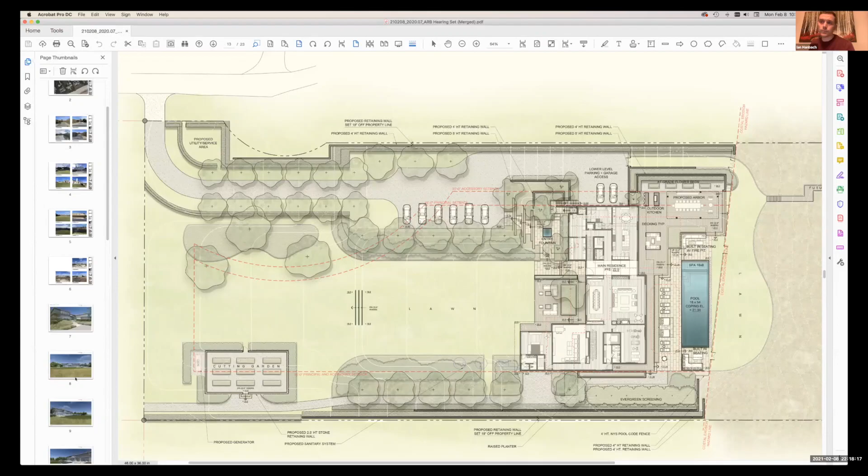Okay, so if that's it from your end, John, I'm going to turn it over to the board for comments. And then after that, I'll turn it to the public. Thank you. Comments from the board?

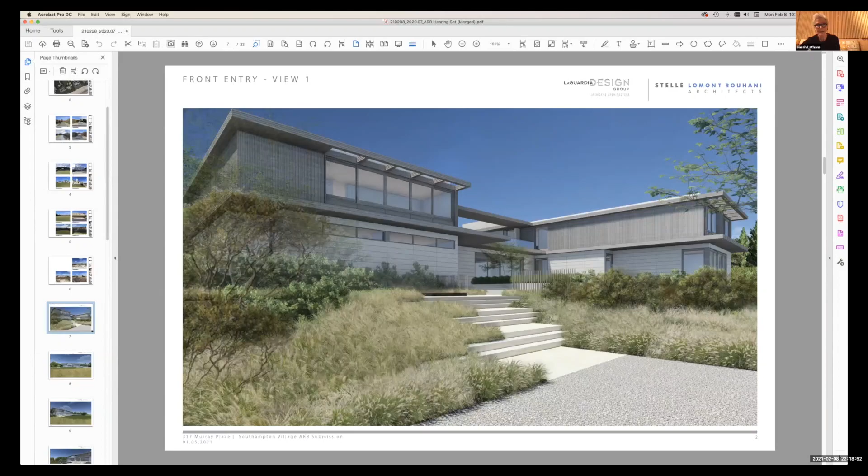Yeah, I wasn't being facetious, I didn't think of it that way. I think it's really quite an amazing design, and it's an original design, and the materials are A+. The horizontality has been emphasized by the overhangs, and the landscape certainly complements the design, and the materials are the quality that we should see in most buildings that are presented. Sadly, we're rarely presented with things of this caliber. A+ from me.

Any other board member comments? I totally agree with Sarah. As much as I hate to see a set for Game of Thrones being destroyed in the mix, I think this is really just elegant. It's simple and it's designed. I love the profile. I think it's just beautiful.

I think it's absolutely beautiful. I would take a little umbrage with Mr. Bennett about the house that was there prior, because I know the family and the owner. I thought it was a very nice chateau design house that was of his vision. But I think this vision is really, really lovely. Oh, nice family, I wasn't saying anything about the inhabitants. No, you're about the house. But I think this is really lovely.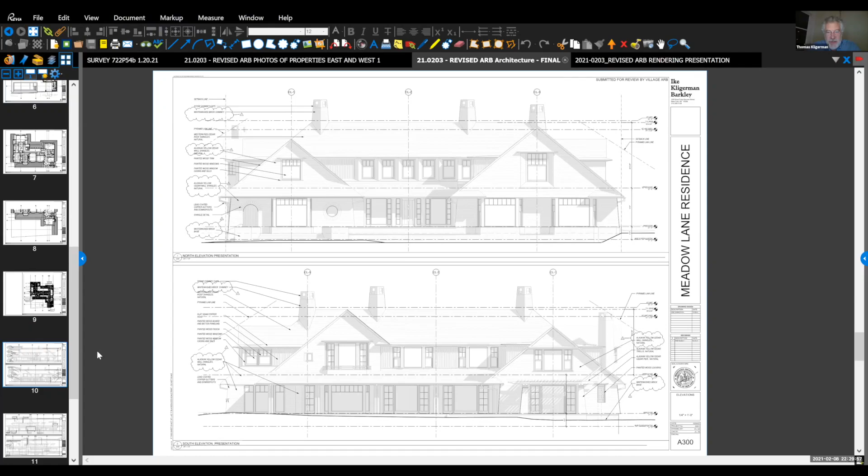The side elevations are a little more casual, but again traditional forms, dormers, a combination of gable dormers and flat roof dormers, a naturally weathered cedar shingle roof, yellow cedar, Alaskan yellow cedar, and then the base of the building - any wall which is not cedar is white painted brick.

Next one. So these are renderings of the house.

This is as you approach the building from the north, you head up a path, up a set of stairs. It's raised fairly high on the dune, it's in a VE zone, so it's been raised to the proper elevation. You enter approaching on this window bay, up a number of flights of stairs. You can see the gray shingles, white trim. The roof looks white here, but that's actually the light reflecting off a gray cedar roof. White trim, white brick on the chimneys, and also in the site walls.

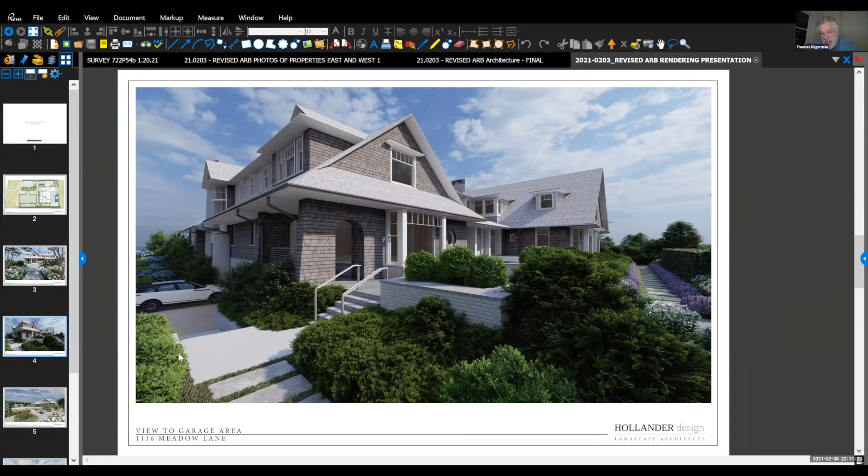You get to the top of the steps there - this is a view from the northeast. You get a glimpse of the garage, which is at a lower level down on the left here, which faces east. And you're looking across the sort of facade of the building, window bay in the foreground.

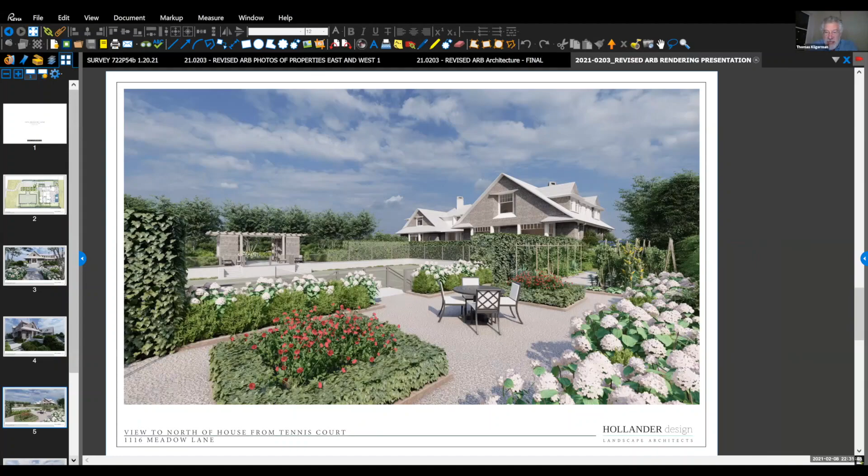Next one. This is a view from the northwest, looking across the tennis court. You can see the house sitting in the landscape. I'm sorry that the roof looks quite so white - this is the way the program reflects the light when you render it, but it is a regular cedar roof. The walls are gray cedar, white trim.

Is that it? I think that's all.

Joe, do we have materials? I don't know if everybody needs to see the actual material photographs. It's white painted wood and cedar, and then again, white brick. So a pretty limited palette.

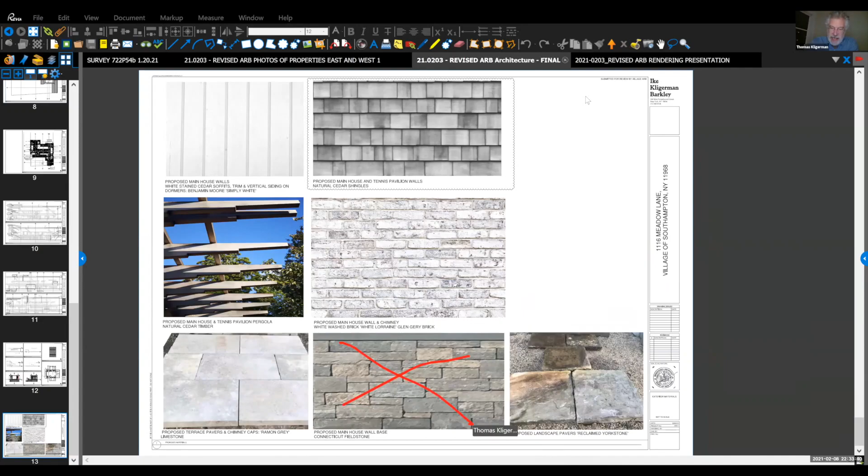It's the house is - here you go. White trim on the upper left, white brick below the cedar. I don't know if I can draw something here. We were looking at stone on the house - this is no longer going to be used. All of the masonry on the house is white brick.

The paving on the pool and the terraces immediately around the house is a very pale Jerusalem limestone. And then once you're out in the landscape, that stone there is a stone from England that's weathered sand - I think it's a sandstone, maybe a limestone. And reclaimed York stone, Tom - it is a reclaimed English sandstone. Oh yeah, this is why I brought Ed along.

And then on the left, you can see the pergola, which is just weathered, probably Western red cedar for the pergola. That's it from our presentation.

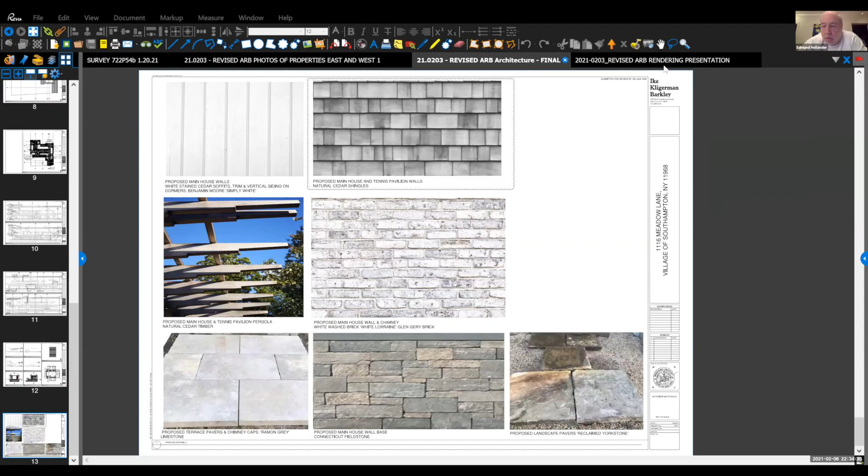Should I give a quick review of the landscape? Sure, Ed. Joe, you've got the controls here? Do we have a quick site plan?

So it's a Meadow Lane house, set back about 250 feet or so, we've got our wetland setback where it'll be all natural, off of Meadow Lane there. The tennis court is surrounded by hedges as per code. It's kind of like what Ian was saying on the last - when we're working down in the ocean, we're trying to come up with plantings and plant materials that are tolerant of this area, that will grow well here, and that will make this sympathetic for the neighborhood and the neighbors, with screening on the east and west sides, natural wetland buffer on the north side, natural dunescape on the south side.

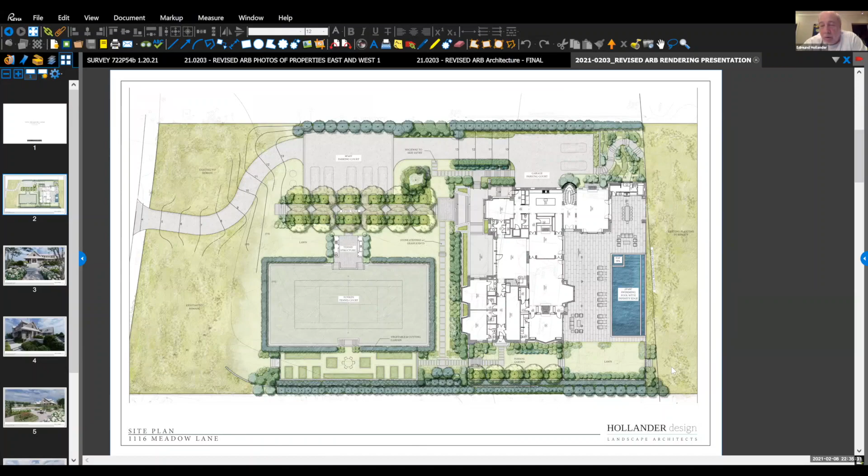Okay, and we're probably, I don't know, 700 - we're a long way from the beach right here. This part of Meadow Lane, we must be back 500 feet from the actual beach itself.

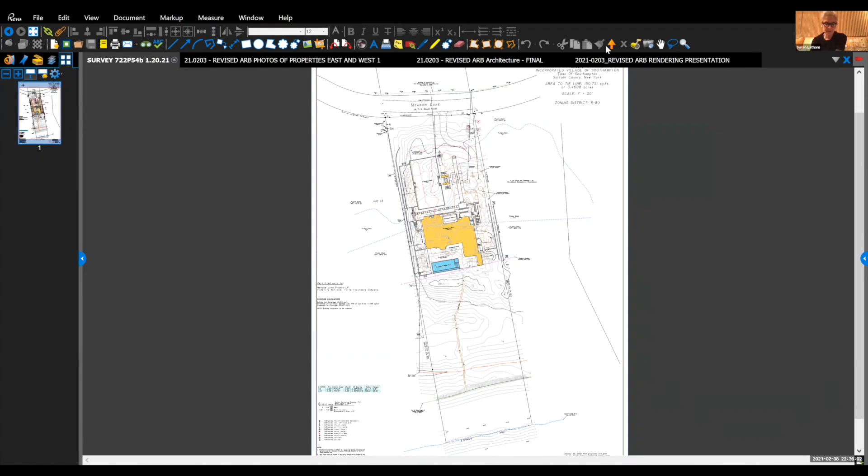Gentlemen, any other comments? I think it's beautiful. I love the shingle style, updated with a knife edge detailing. I think it's great. And it's nice to have talented people before the board. Thank you. It's nice. Come back anytime.

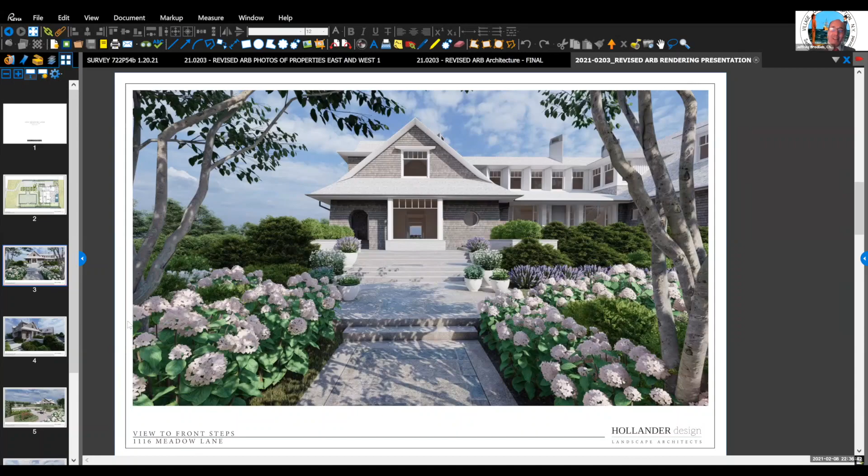I have a question about the back profile of the house, just for my own education - the beach side. Yeah, that overhang on the far right side of the house - can you explain? Is that like a sunshade for the windows, or what's the intent? The visor?

Yes, it's a visor. It's sort of a motif that goes through the whole house, whether it is over an individual window like this one, or along these sort of knife edge visors over the horizontal dormers. It's also picked up in things like this return on the big gable, in these knife edge rake moldings on the house, and even in the form of the chimneys and other smaller details.

Maybe I'm strange, but the only thing I thought about were seagulls nesting in that nook. There's a product called Nixalite you may have to use, but that's a very good point. It's beautiful.

All right, well, to summarize, it's a wow. And to reiterate, it's nice to see a traditional looking house at that end of Meadow Lane that still has, but at the same time, has an element of contemporary aspects to it as well. You guys have pulled it off very well.

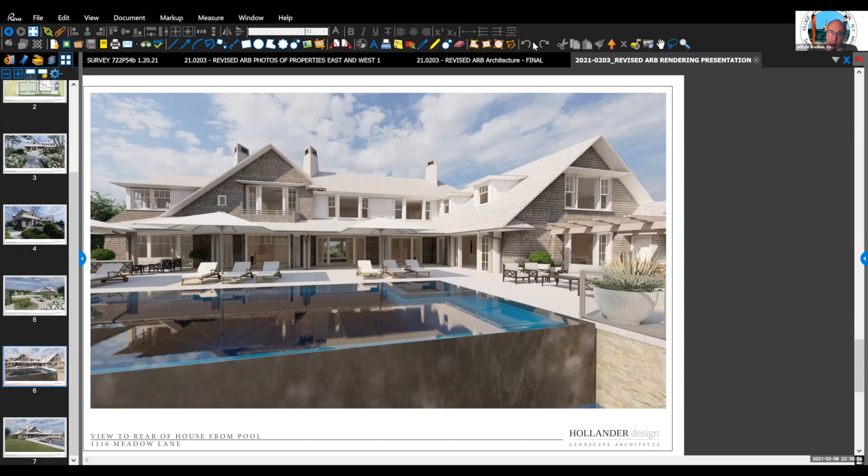With there being no objections from the board or comments from the public, I move that we accept the application of Meadow Lane Propco - is it LP as opposed to LLC, John? Whatever the file documents say. Okay, well it says LP at 1116 Meadow Lane for a 2-story single-family dwelling with attached garage as submitted. Do I have a second? Second from John Gregory. Do we have ayes? Aye. Okay, we have all ayes and no nays.

So that being said, good luck, guys. Thank you so much. Bye-bye. Thank you.

Good night. Okay, so we have one final application which has been adjourned, and that's for driveway gates in the non-historic district for DMDC Holdings LLC at 128 Prospect Street. I move that we accept their request to adjourn - that is a request to adjourn to March 8th. Do I have a second on that motion? Second. Okay, all in favor? Aye. So we accept the applicant's request to adjourn to March 8th.